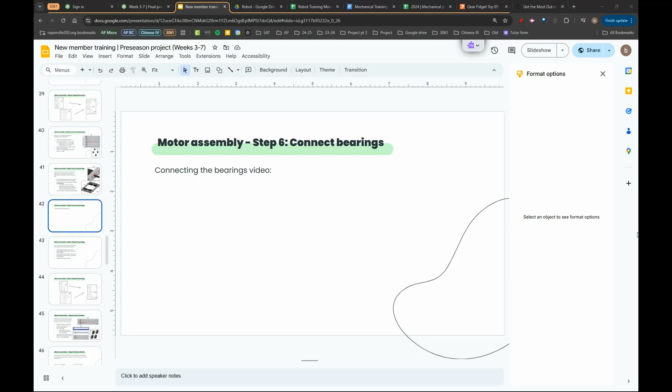Alright, so you should be having finished step 5, and now we are on step 6. So the way bearings are attached, it should look...

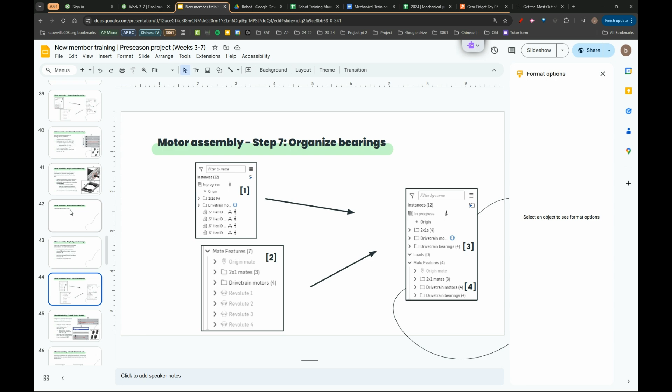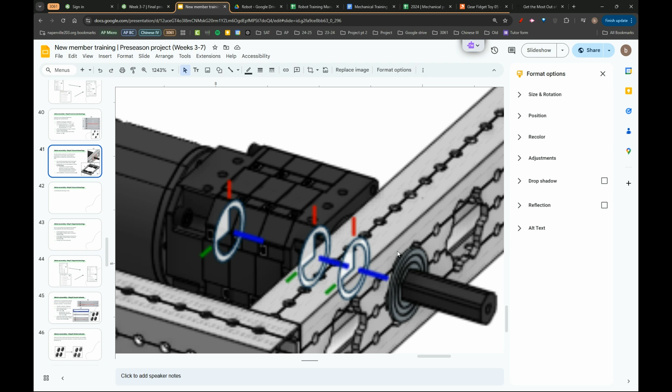It's kind of hard to see, but it should look something like this, with the outer flange of the bearing. The flange is this wider part, and it should be on the outside of the tube. You'll notice it's on the outside of our entire drivetrain.

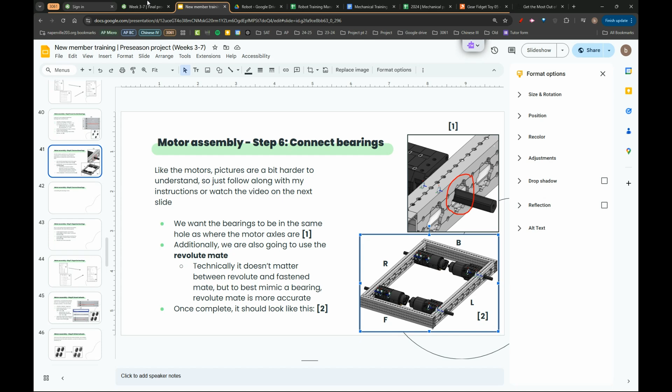Okay, so we are going to take these two bearings with the flanges pointing right on this side of the robot, and the two flanges pointing left on this side of the robot.

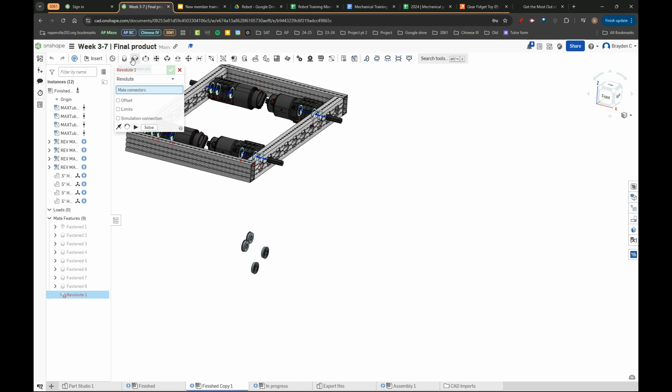What we're going to want to do is use a revolute mate for this. Click revolute mate, right next to fasten mate. Fasten mate is what we use for everything else so far. Revolute mate is what we're going to use for bearings. Technically, between these two, the type of mate doesn't make a difference for things like this. If you're making something like gears, it'll make a difference, depends on what you do. But for this case, just out of good practice, we're going to use the revolute mate.

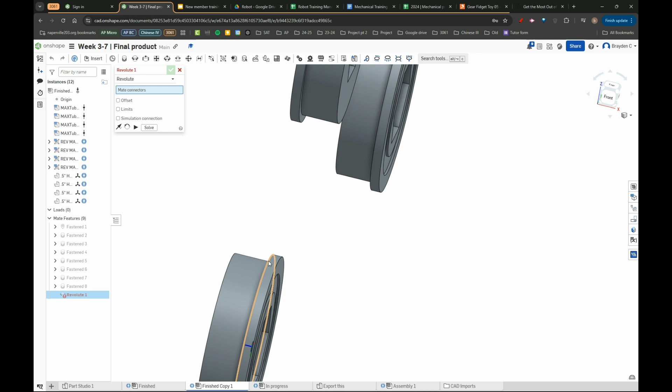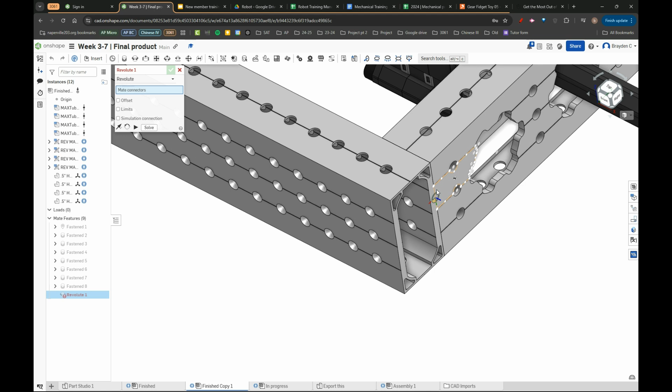So we want to select the inner part, the part of the flange that points to the rest of the bearing. This edge right here, because if you think about it, this edge is going to be planar or normal to the 2x1. What normal or planar basically means is like this 2x1 right here is planar to or normal to this 2x1 here. Basically, it just means two faces are next to each other.

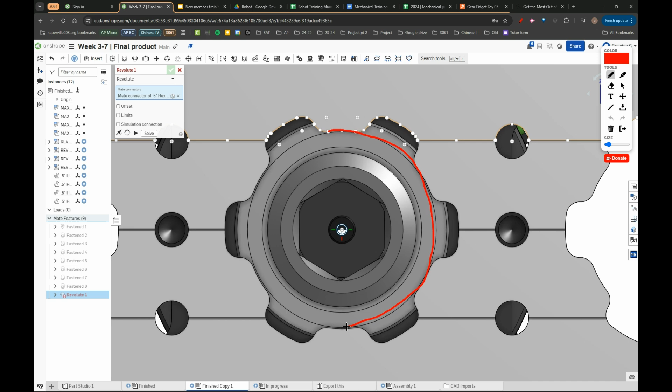So what we're going to do is select this edge right here. In order to select it, basically if you look at this, it doesn't look like a circle. We can kind of see how this right here kind of traces a circle right along here, kind of makes a circle. This shape seems very unorthodox, but there's a reason it exists.

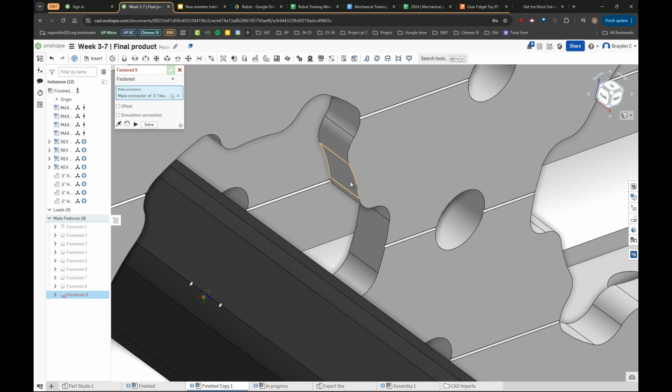I'm not going to go into too much, actually I can explain. The reason we use it is because when the manufacturers actually make this, they're not going to be able to make a perfect circle, for a bearing in this case. So what they have to do is create these divots for some amount of flexibility.

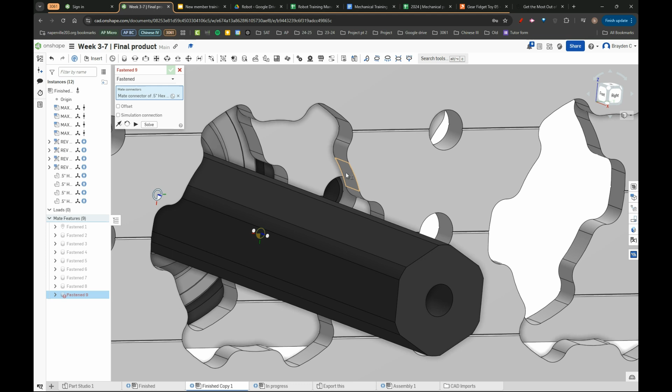We do that too, but we're still experimenting with it. So what you're going to want to do is for all of these almost little flaps, you want to select this face so where you see something in the center, those same three dots. Once you see the three dots, you want to hit Shift and now select. Actually, once you see the two dots and the mate connector, hit Shift, and now you can click. You want to click the outermost one. Keep holding Shift as you click it, and then once you're done, hit the check mark.

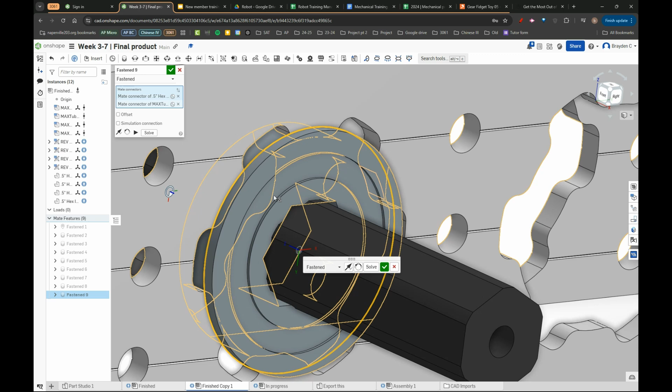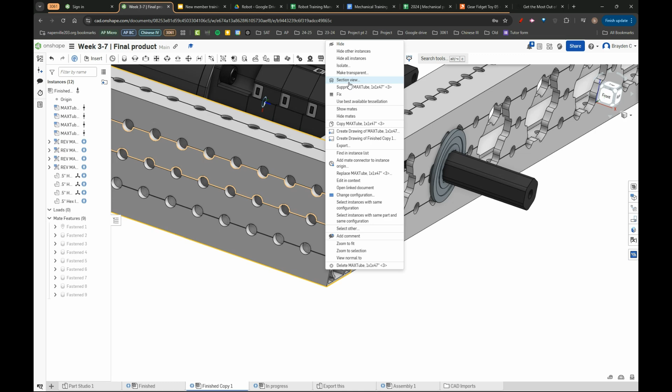Something that's really cool as well is let's do what's called section view. Section view, you literally it's almost like slicing it in half. You can see cross section views. So it's right click, section view, and then you have to select a face, and you can move this around. You can see the cross section of everything. That's really cool, extremely cool.